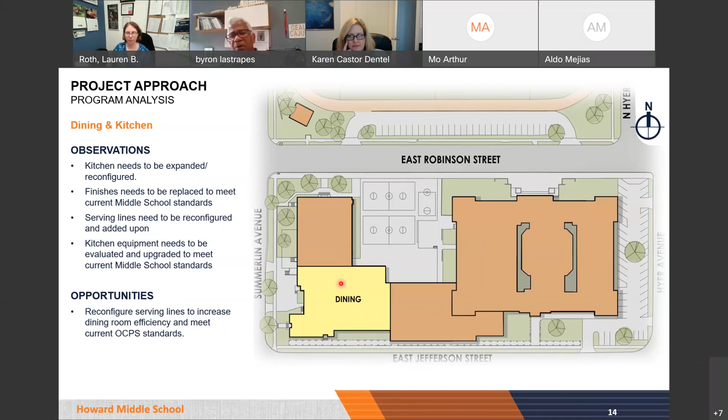The kitchen and dining. One of the things in dining is we're going to redo the dining room. We're going to have new furniture, dining furniture there. Also lighting, ceilings, floor, the whole image of the dining room. And also the main thing we're going to do is reconfigure the serving lines that are there, to increase the dining room efficiency and to meet some of the current OCPS standards. I think currently you have 2 serving lines. Now we're going to improve it to, I want to say 4 to 5. So that's going to be improved and it's going to help our efficiencies.

The auditorium, this is going to be a big thing. I mean, this could be a project within itself. One of the things we're doing here is enhancing a lot of the lighting, a lot of the ADA, and also really looking at the seating to see if we need to replace it or not. A lot of the seats are broken and they're small, and we're looking into doing things like that and improving the sight lines within the auditorium.

But the main thing is that we're going to look at the spaces surrounding the auditorium. Right now there aren't proper dressing rooms for actors into this stage area, so we're going to provide dressing rooms in this area.

We have a drama classroom. We have a theatrical arts, or the theater technology classroom here, where we build the props and all the flats that are used for performances. We're going to have storage behind the stage that is convenient to the stage, so we can bring instruments, or Marley, or chairs and things like that, with easy access to the stage. And also we're looking at building a black box theater to also support the drama program. So there's a lot of things that are coming in.

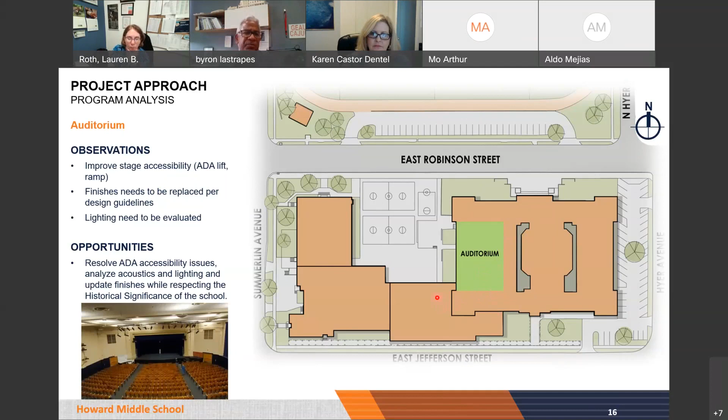Our classrooms, again, we're going to take all our classrooms and bring them up to our prototypical standards, including technology, furnishings, lighting, and finishes within all classrooms.

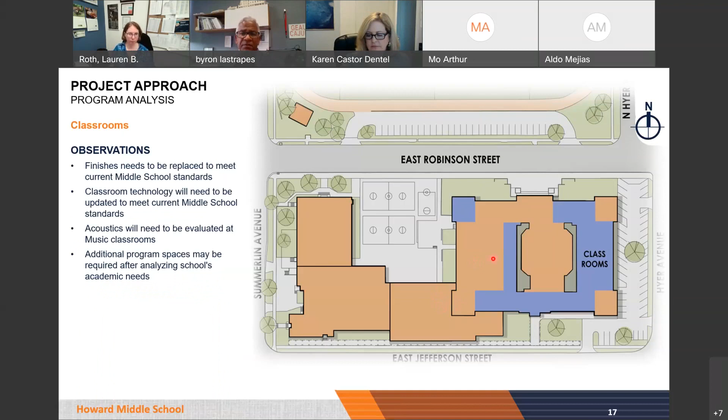The other thing is the courtyard. The courtyard is a very important social hub into the school. I live in a neighborhood, so I know at 9:20, 9:25, this courtyard is full of kids waiting to be let into the school. I see all the activities and running around in the different areas and activities in this courtyard. So this becomes a multifaceted room.

And we're going to try to maintain those things, where we're going to have areas for athletics, areas for socialization. We're also proposing an outdoor performance area, an outdoor dining area, if that's appropriate, and also a covered area to have a little shade relief and rain relief, weather relief from here. So this is something we're currently working on, and this is a very important part of this project.

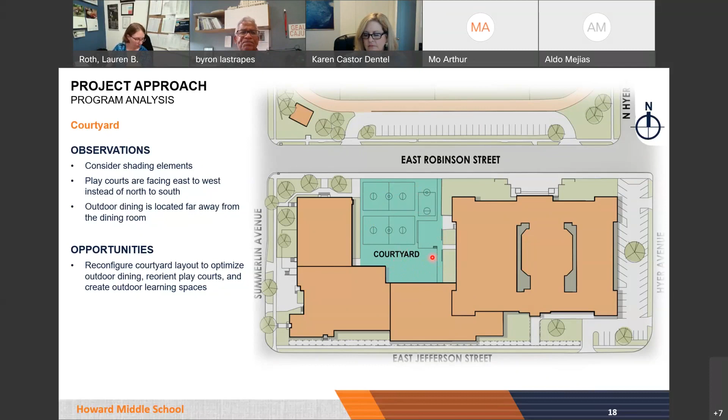And finally is our site. We're looking at the site, we're looking at the parent pickup. This is a very difficult thing since we don't have the space, we don't have the real estate. We looked at providing more parking. There's just no place to do it. But I think the staff, the community, the parents, I think we've all made do with what we have. And all we can try to do is improve and make safer what is existing right now.

So we are providing additional stairs, or improved stairs and handicap ramp, to provide better access into this area. And we're doing some overall paving improvements around the campus, and looking at rehabilitating and helping out some of these retaining walls that we have around the campus.

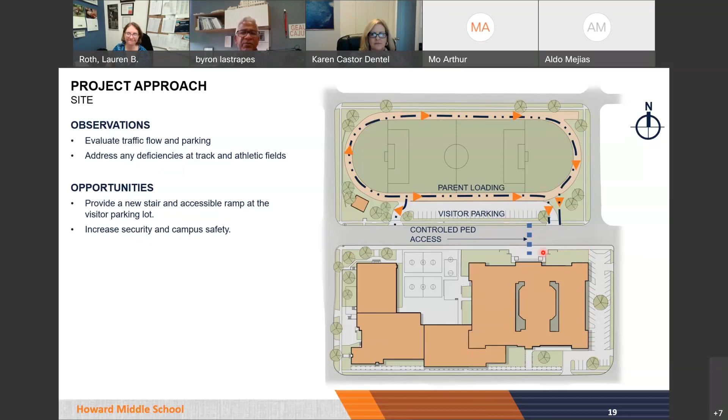So now that is kind of what we're doing on this project. So our next chapter we're going to talk to you about is sustainability.

We're going to bring a lot of the systems into this building up to date and to meet modern standards and modern codes. What that means is our energy use is something that we're going to be monitoring, and we're going to be very conscious of. We're going to provide high efficiency chillers. We're going to replace the roof and have a light color roof to help lower our solar gain, our heat gain. A lot of our equipment is going to be Energy Star rated, and we're going to have water saving fixtures and toilets and things like that to help save a lot of our water and natural resources. So this is something to improve the efficiency of our building and all of our systems.

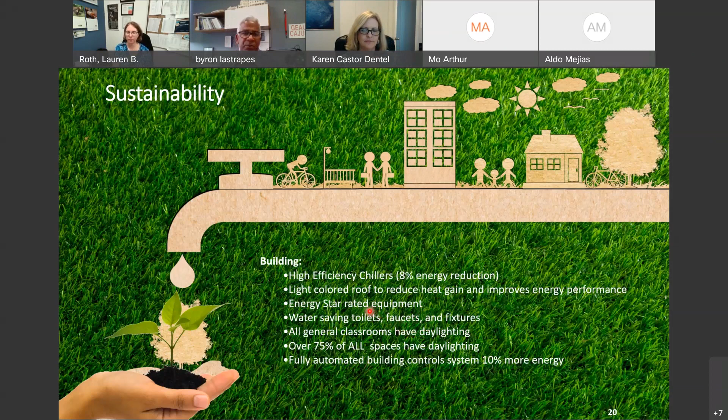Now I'd like to conclude with our design and construction schedule. As you can see, we are right here on May 4th. What we're going to be doing is completing our design, and our design is basically going to start being completed around November.

This is when we're going to go into bidding and permitting. Design will continue because bidding and permitting will generate some comments and revisions of our documents. But basically, it is our intention that by March of next year we will be able to start construction, and it will go on to complete about the late fall of 2024.

Two things you need to understand: this construction process will be in phases. So we will take portions of this building and do certain areas of it. The reasoning is the building will be occupied, so we can't shut the building down like we did in the year 2000, where everybody moved across the street.

We're going to have portables set up in the courtyard, and classes that are there at certain times are going to be relocated into those portables. That's why it's going to be done in phases, and that's why we're going to have a duration of about 18 to 20 months during the construction process.

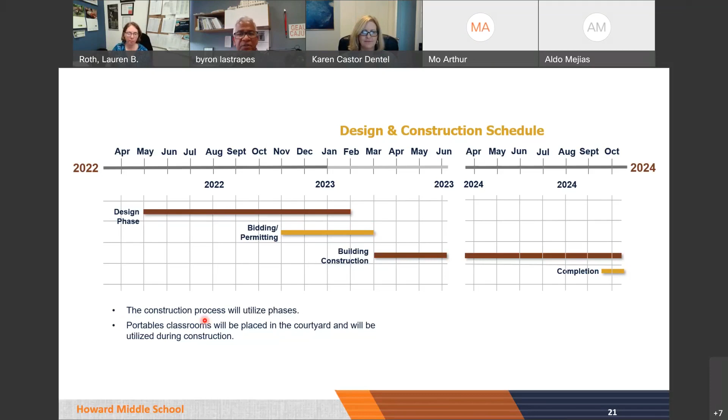So with that, I'm finished with my presentation, and if anybody has any questions, we're here to answer them.

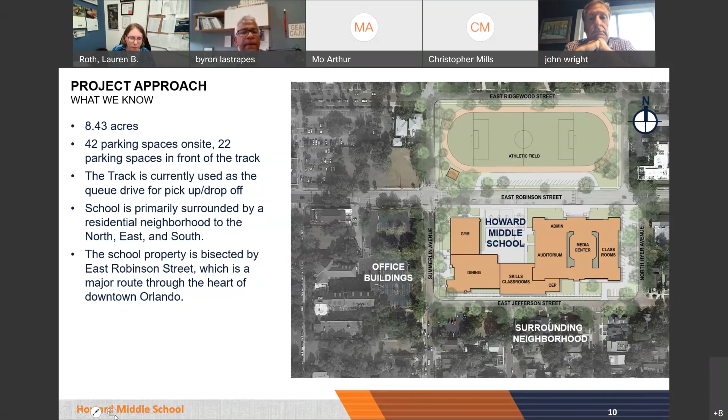I think the concern, and I've spoken to the engineer who's designing this and shared my concern, is that right now before this gate is open, sometimes you get parents showing up at 3:30 and this whole area is backed up, at least in the right lane. If it's not a problem once the gate is open and all the cars are flushed inside, that's fine, but having two lanes, I could see if there's any backup here of parents waiting to queue into the property, that would definitely be a problem because that would make Robinson Street come to a standstill.

Hopefully we'll have more information the next time we meet, but it's good that these things are coming up now.

Mr. McCracken is also asking - and it looks like Ms. Reyes already answered it, so I'll just read the whole thing. He asked, can the city or state finally designate a school zone on Robinson at the same time? We've tried for many years unsuccessfully. She responded that school dismissal should be addressed in the design stage, and to please set up a meeting with the city.

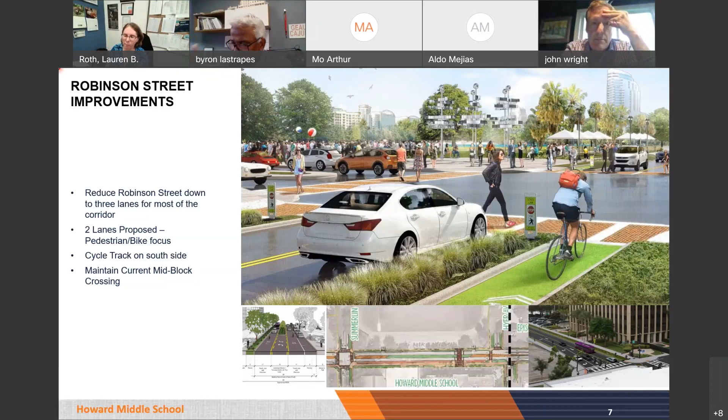The point is that theater tech will do spray paints, like you're saying, spray fixatives and things like that. We are looking at providing them access by the stage, and the location we provided for the art room upstairs is directly across the center stair by the media center. So if you went down that stair, you're right there by the courtyard also, so you're not going out into the front yard or somewhere unsupervised. But I do see your concern, and knowing this, we could look at alternative solutions.

Mr. Wright, go ahead. Could there be some type of outdoor arts classroom? Maybe not a classroom every day, but if an art teacher knew they were going to do some outdoor spraying today, they could use that space. Or even, I'm thinking, a sculpture garden, given the rich history of the school.

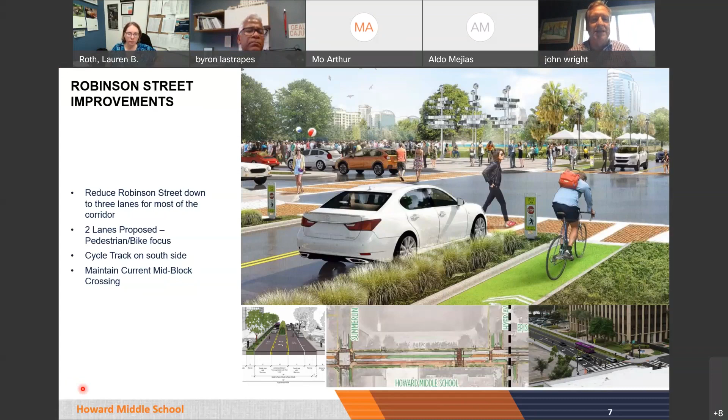Currently in the media center there are those display cabinets, so it's like a little quasi history museum. Is there a way we could get something more to emphasize the history of this? It's our oldest school still in use, I believe, within Orange County Public Schools. It's our downtown, performing and visual arts magnet school. I've heard comments about the track and facilities, but the emphasis of this art school really needs to be the arts. So any kind of creative outdoor art spaces and classrooms, I think, would be a benefit.

Okay, thanks Mr. Wright. Yes, Mr. Wright, one of the things we talked about earlier is that one of our goals was to look at this front lobby and turn it almost into a history museum, to express a lot of that stuff we have hidden in this little area in the media center, and put these things on permanent display, along with other areas when you enter this building.

We are about to review and work with OCPS to create the corridors, create nodes and pods and areas for display. We're taking inventory of all the great art on the walls. Where do we put the wings? Do we frame them? Do we put them somewhere? All the art you have, the Mona Lisa, what do we do with those things? So we're trying to create, at minimum, when a visitor walks in, a main street here.